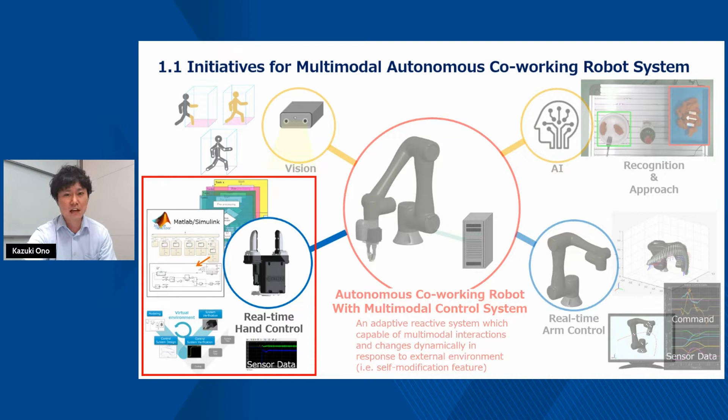To begin, I'm going to start with the explanation of multimodal control system for coworking robot system that we are working from. We define the autonomous multimodal control system as a system that can respond to environmental changes reactively and autonomously, based on multimodal information obtained from vision and AI, as well as sensing information from sensors mounted on robot hands and arms. In today's presentation, I will focus on the development of a robot hand equipped with multiple sensors.

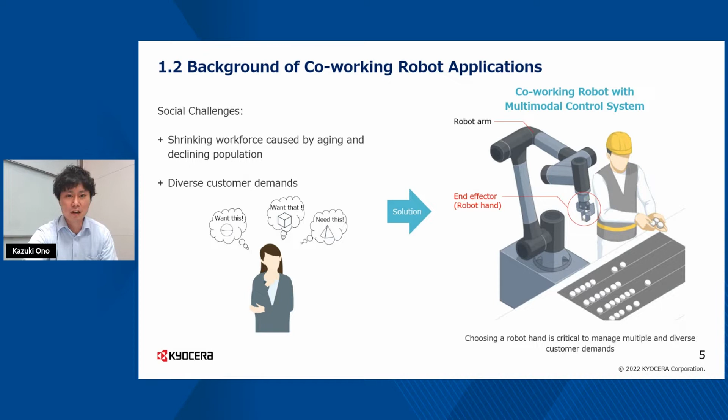Next, let me explain the background of coworking robot applications. Probably most of you have already heard that the shrinking global workforce and declining population could impact economic growth. Also, since consumers crave personalization addressing their unique characteristics, preferences, and backgrounds, the aging populations are a major challenge to serve diverse customers. That is why coworking robots with multimodal control system have attracted attention in recent years as a solution to these challenges. In this presentation, we will focus on one part of the multimodal system, which is the development of a robot hand equipped with multiple sensors.

You know that the human hand is known for its ability to manipulate objects and perform tasks with great degree of precision, such as gripping and grasping. On the other hand, it is very difficult for a robot hand to manipulate objects as precisely as a human hand, because a robot hand is usually designed specifically to perform specific tasks, since there is no practical general-purpose robot hand that can replace the human hand to perform any task.

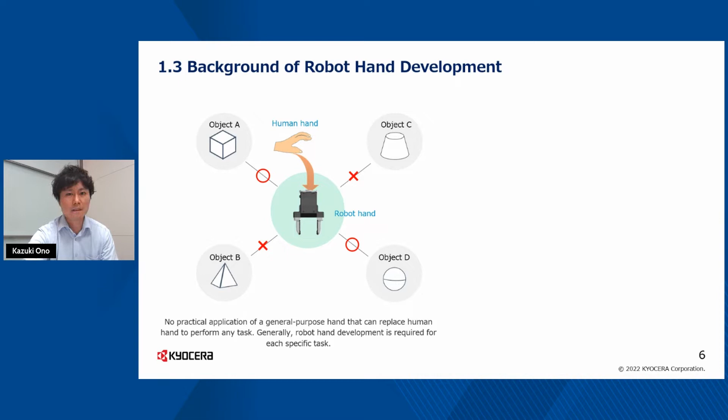Generally speaking, robot hand development is required for each specific task and object. This is a problem because this development requires a great amount of time and resources. That is why I think we need to think of a method to develop a robot hand that can respond quickly to various customer requests.

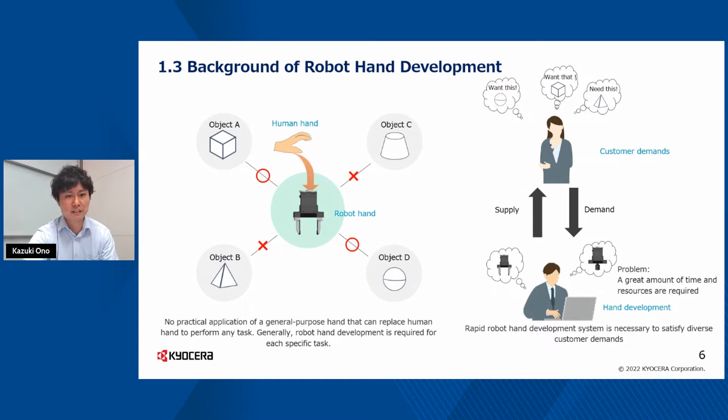That is where we introduce our proposal, which is a software development kit for robot hand control system development. We believe that by using our proposed SDK, we will be able to develop this robot hand system efficiently. In Chapter 2, I will explain the features of this SDK in detail.

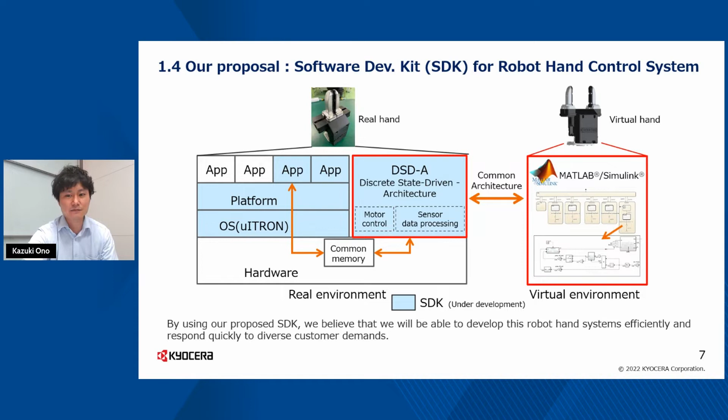Another approach that I'm going to cover in this presentation is model-based design. By using MBD shown on the right, front-loading the design process can be done, which then improves the design quality. Also, robustness can be estimated by considering variations and noise in a virtual environment. We believe that MBD is another approach that can be used to develop robot hands quickly.

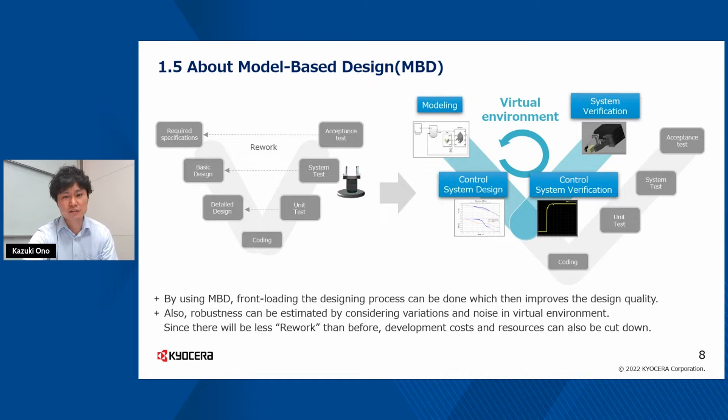Next, let me explain our SDK proposal for robot hand control system in detail. Let me talk about three features of the SDK for robot hand development. First, the SDK is divided into a discrete state-driven architecture part, which performs sensor processing and controls actuators, and an OS part, which manages other applications. Second, the DSD-A and OS parts exchange information via common memory.

Third, the DSD-A part handles the design of control software related to the hardware configuration, such as the type of sensors or motor control. This feature is particularly important because the key to increasing the development speed depends on how quickly the DSD-A part can be built. From the next page, I will explain the features of DSD-A in more detail.

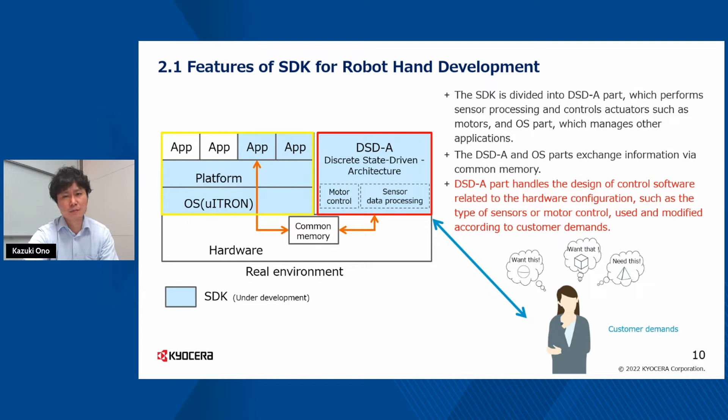One of the most significant features of DSD-A is that it can be described by Simulink and has a common architecture in real and virtual environments. This means that you can design DSD-A in a virtual environment and then replace it with the software for the real environment. Next, I will explain the process used to develop the DSD-A system.

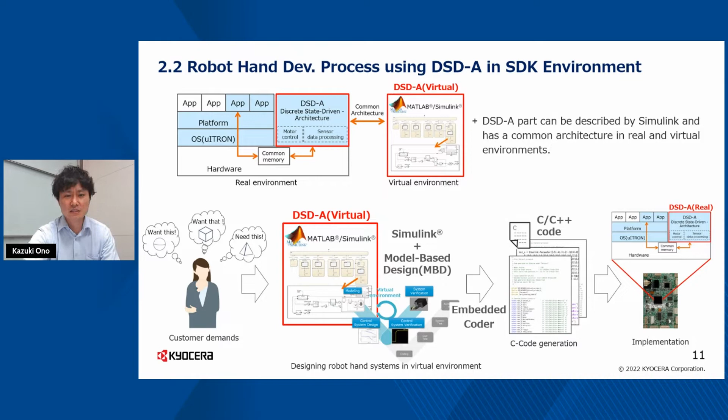The first step is to design a DSD-A hand system in a virtual environment using Simulink and MBD. Next, use the Embedded Coder of the MATLAB tool to convert it to C language. Then, directly implement the real DSD-A system content onto a microcomputer. Using this process, the system can be developed without programming. Now, let me explain more about the detailed structure of DSD-A.

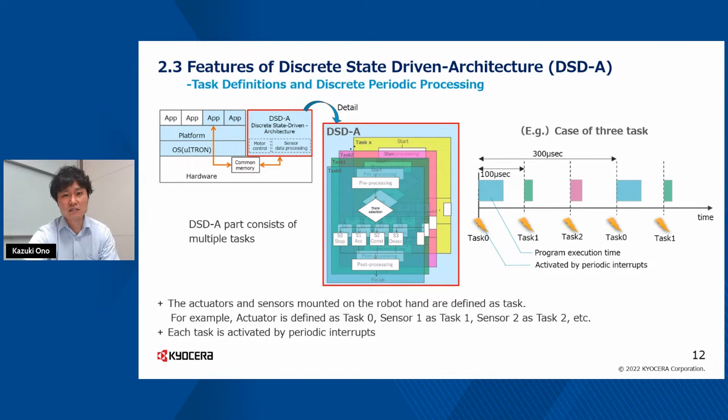DSD-A consists of several tasks. The actuators and sensor mounted on the robot hand are defined as tasks. Each task is activated by periodic interrupt.

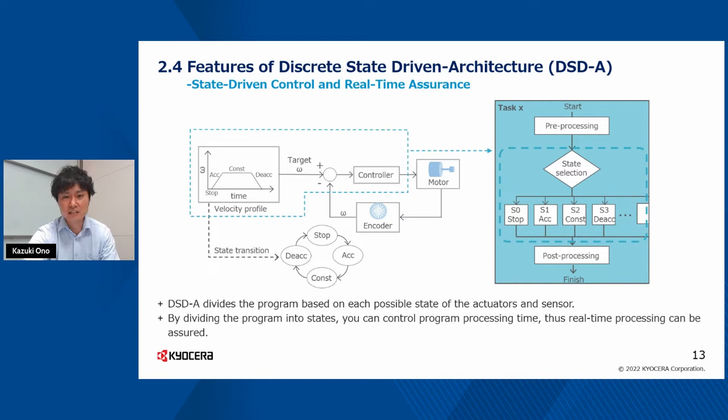Another feature of DSD-A is that it has a discrete state-driven structure. This page's content is also explained in Chapter 3, so I'm going to briefly introduce it here. DSD-A divides the program based on each possible state of the actuators and sensor. The important thing is by dividing the program into states, you can control program processing time. Therefore, real-time processing can be assured.

Let me summarize the content of the SDK and DSD-A. By using our proposed SDK, we believe that we will be able to develop this robot hand system efficiently. I explained that inside the SDK, the DSD-A part basically handles the software design based on customer requirements. This DSD-A has three features.

The first is it has common architecture in both real and virtual environment. Thus, it is possible to seamlessly implement the content designed in the virtual environment onto microcomputer. Second is that each task of DSD-A is activated by periodic interrupts. And finally, with DSD-A, real-time processing can be assured.

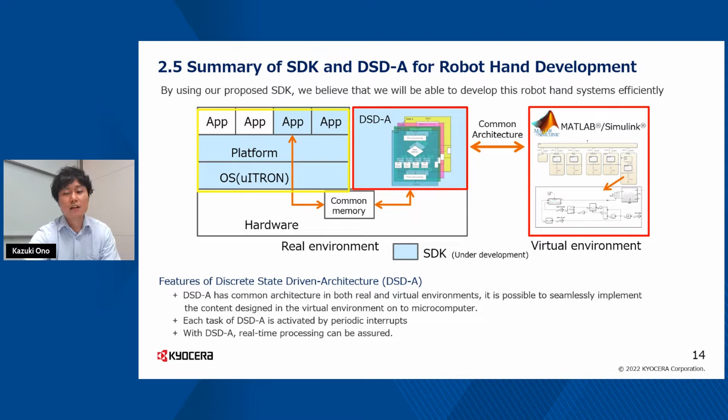In the next chapter, I will provide an overview of robot hand development using the SDK and MBD and MATLAB tool. This is a practical example of our robot hand development. I will introduce a parallel-chuck type hand system that can control stroke width by acquiring velocity and contact force information in real time. This is a block configuration of robot hand real system.

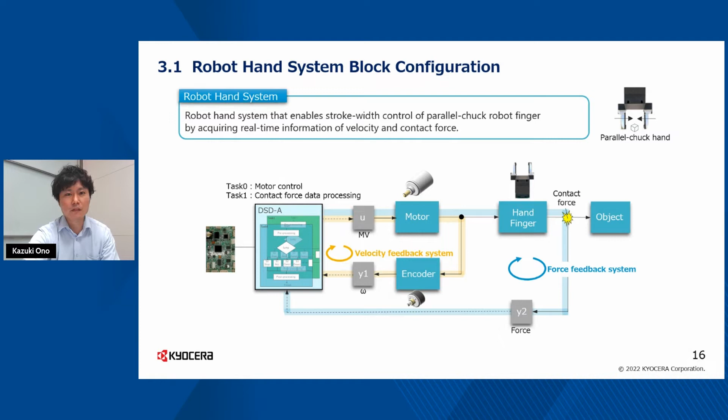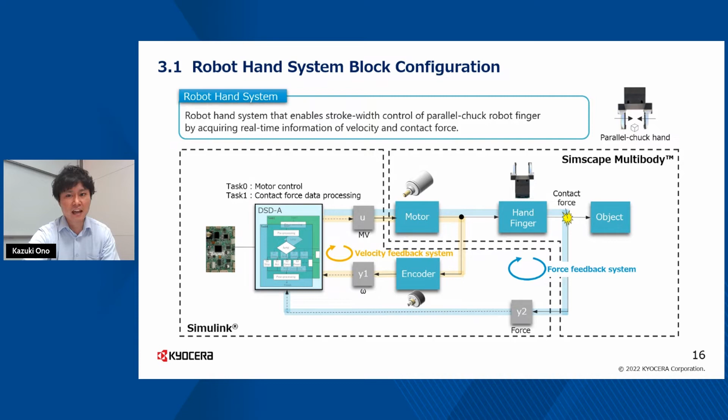Next, let me explain the process of robot hand development using MATLAB that we carried out step by step. Inside this system block configuration, DSD-A part is modeled by Simulink, and the parts of the mechanical mechanism, object, and contact force are modeled by Simscape Multibody.

The first step of robot hand development is plant modeling. This is a system block configuration modeled by Simulink and Simscape Multibody. For example, DSD-A is written using Stateflow to perform task scheduling and control system design. Also, contact force modeling can be represented using Simscape Multibody contact force blocks.

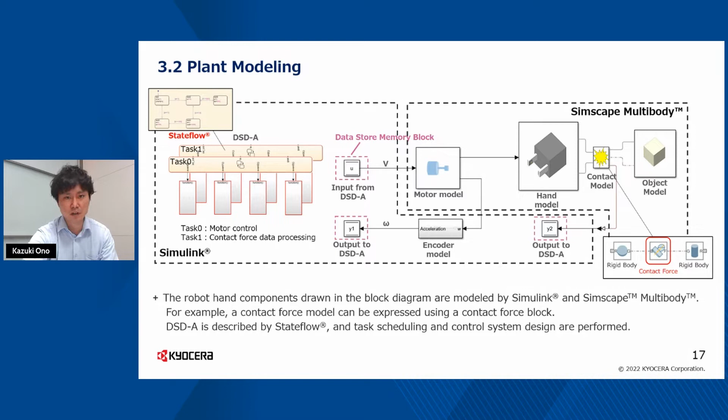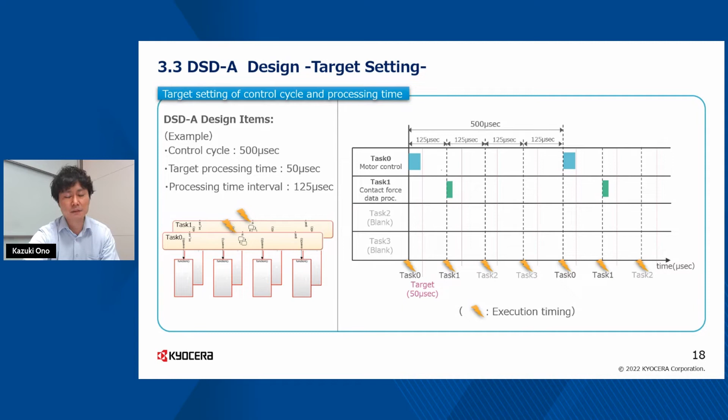After setting the control cycle and processing time, we then assign the state to both task 0 and task 1. As described in Chapter 2, we assign these states to DSD-A based on state transitions. For example, for task 0, which is the task for motor control, we have four states of velocity profile which are stop, acceleration, constant, and deceleration.

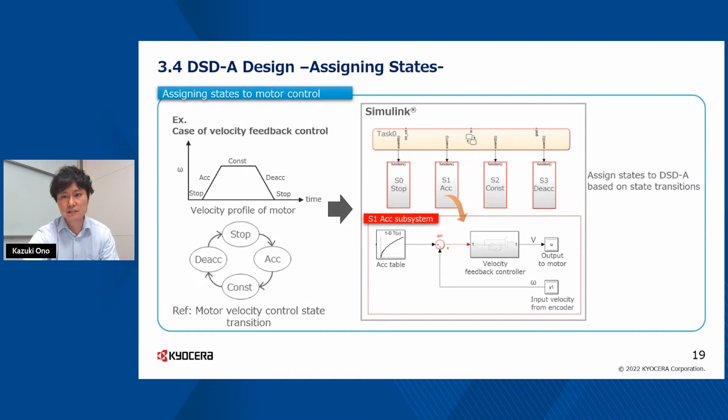We use Simulink function call subsystem to create and set table for target velocity and velocity feedback controller for each state. After assigning state to task 0, we also need to assign task status to task 1 similarly.

Next step is to design the control system with DSD-A. The control system can be designed to include sampling frequency and dead time. In this model, the sampling frequency is expressed by setting the Stateflow to start periodically, and the dead time is expressed by using the transport delay blocks.

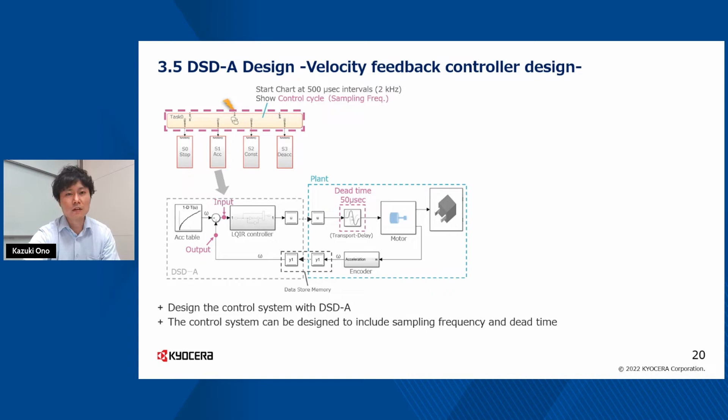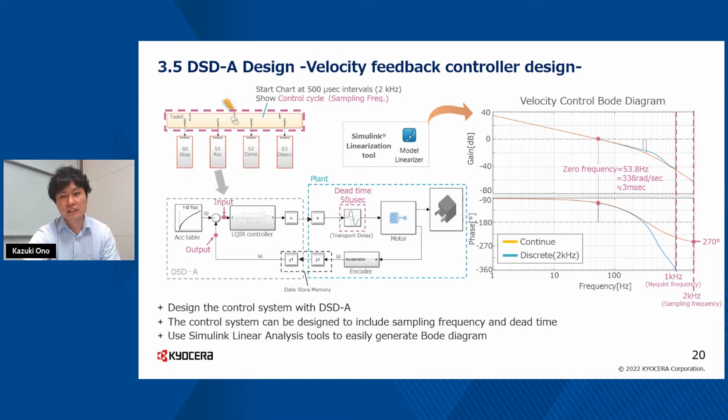Bode diagram can be easily drawn using the Simulink linearization tool. In the Bode diagram of a discrete system, you can see that the sampling frequency and dead time are included. On the next slide, we will verify this control system.

Here, we can confirm that the motor velocity signal realized with a time constant of 3 milliseconds against the step signal indicated in yellow line. This corresponds to the zero frequency in the Bode diagram, and the validity of the control system was confirmed.

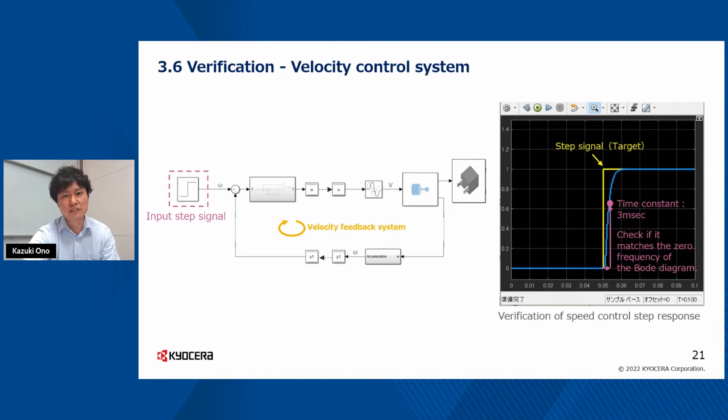Simscape Multibody enables visualization of robot hand system dynamics. This scope monitors the result of motor velocity according to the movement of the robot fingers. Blocks from the dashboard library allow you to manipulate the model freely during the simulation. This video shows how inputting the target position during the simulation and pressing the moving button starts the finger velocity control.

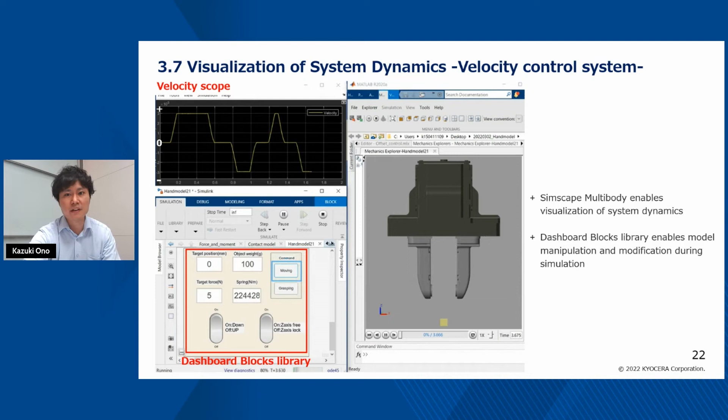So far, I have demonstrated how to design velocity feedback control. Next, I will talk about force feedback control. The result of the simulation is shown on the video on the right. Here, the target force is set to 5 Newtons. As soon as the robot finger contacts the object, the contact force exceeds the target force value, and then about 60 milliseconds later, the stroke width is adjusted, and the contact force converges to the target force.

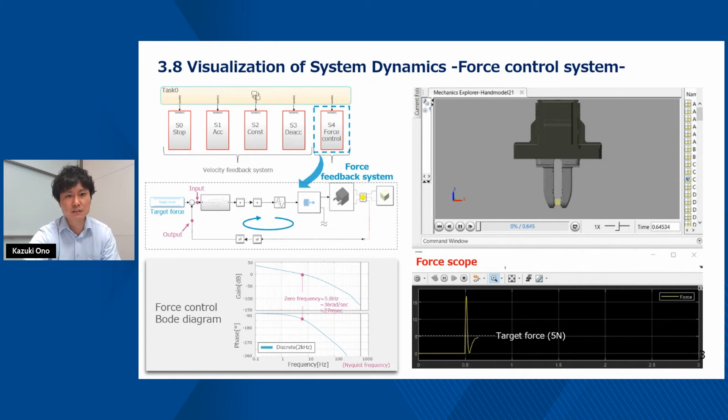By doing this, we can check system performance and detect system problems early. In the next step, the DSD part designed in the virtual environment is converted to C language using Embedded Coder. The converted code can be directly implemented into the microcomputer of the real DSD system. One advantage of using Embedded Coder is that it can greatly reduce programming time.

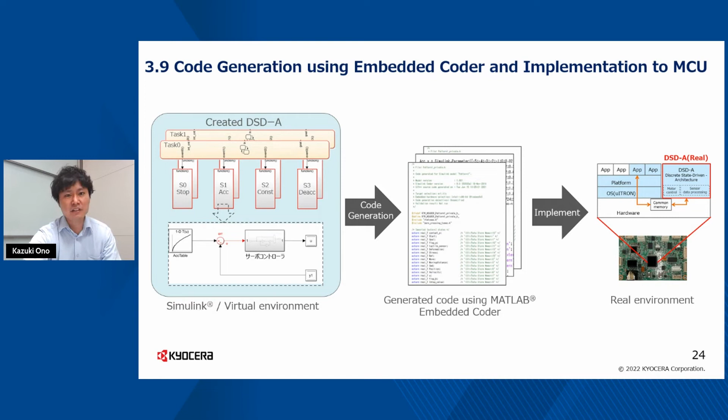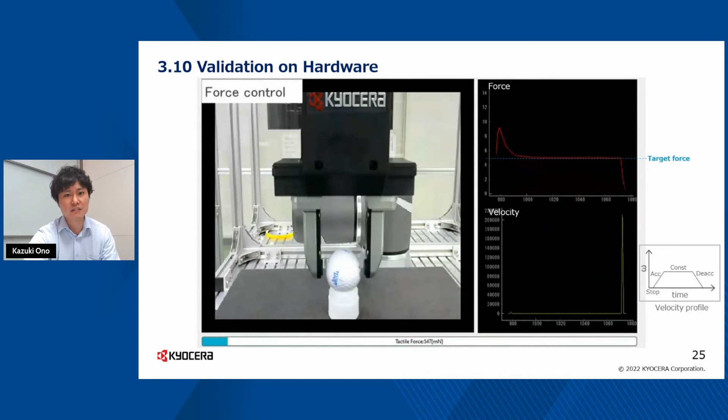For validation, the microcomputer is mounted on the robot hand. First, the robot finger is controlled using velocity control, and you can see here on the velocity graph that it matches the velocity profile set beforehand. As for force control, the contact force exceeds the target value at the moment of contact, but it converges to the target value immediately, similar to what happened during simulation.

In Chapter 4, I will give an overview of algorithm development such as motion plans that we are working on in addition to robot hands, and introduce our initiatives towards multimodal robot systems. We also use MATLAB to model the robot arm. If the robot is ROS compatible, its model information will be open source, and we can easily import the robot model using Robotics System Toolbox.

We are also developing motion plan algorithms. In order to visualize the results of our algorithms, we combine them with the arm model to simulate system dynamics. Moreover, we are working to use the model developed in MATLAB to operate the actual machines. In this way, we have created a process in which the robot arm can be verified in both real and virtual environments.

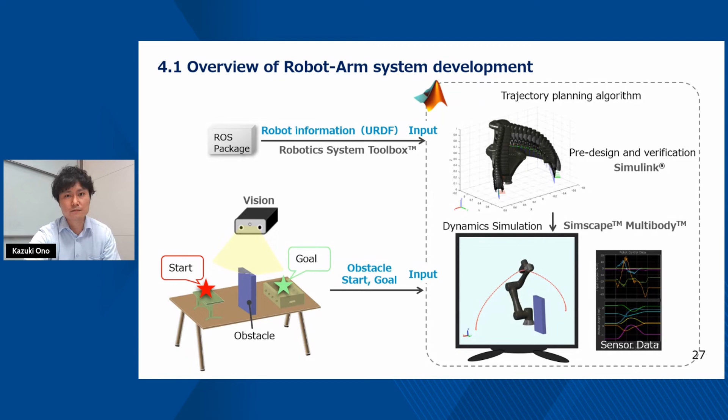We combine all model components of vision, robot hand, and arm. Since our hand system was built using DSD, it is possible to assure real-time performance and synchronize data communication with the robot arm component. Also, the arm can operate based on various data results obtained by other components, making it possible to perform multimodal control.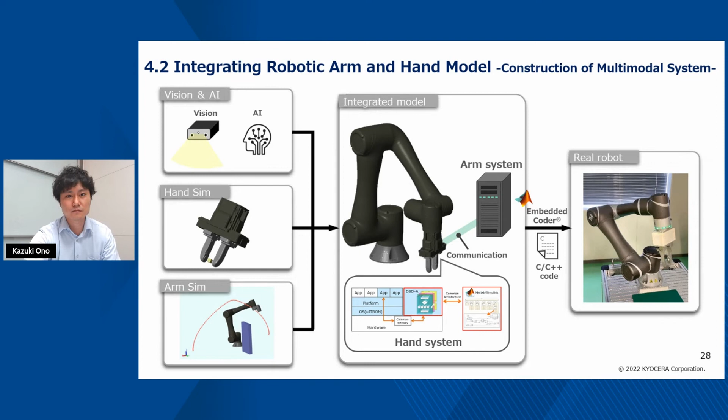Here, the calculation result from the dynamic simulation of the integrated model in MATLAB is input into Unity for visualization. In this way, by reproducing the user's environment such as lighting, shadows, objects, and obstacles in a virtual environment, we can solve various problems that may occur in the real environment in advance. So design quality can be improved, and development time and cost greatly reduced.

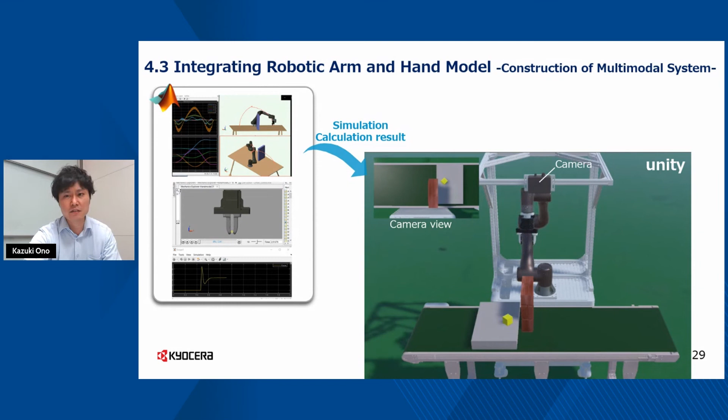So let me summarize today's content. I'm mainly in charge of the development of the robot hand system, and I created the model using MATLAB tools and built the system on DSD. I started using MATLAB tools about 2 years ago, and in my opinion, the UI design was very easy to understand. Therefore, I think it is possible to build a system even with little programming knowledge.

Also, there are a lot of applications that can help with the design of the control system, which reduce development time and resources. I also like the fact that there are a lot of visualization tools such as Simscape Multibody. Visualization tools have made a great contribution to detecting system problems as well as visualizing data communication. Embedded Coder was very useful. I think we have saved a lot of development time because we don't have to write scripts manually.

However, there are a few requests I would like to make. Simulation performance was degraded for complex simulations, such as contact force, multiple sensors, and robot complexity. Especially for contact models, simulation accuracy is very important and data reduction is rarely possible. So I hope MATLAB will provide tools to understand the trade-off between performance and precision.

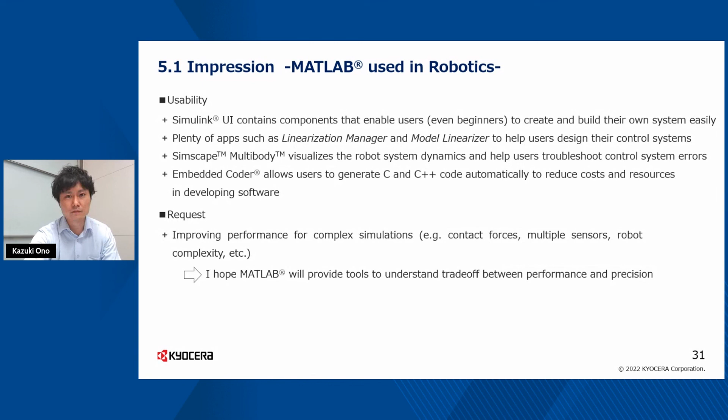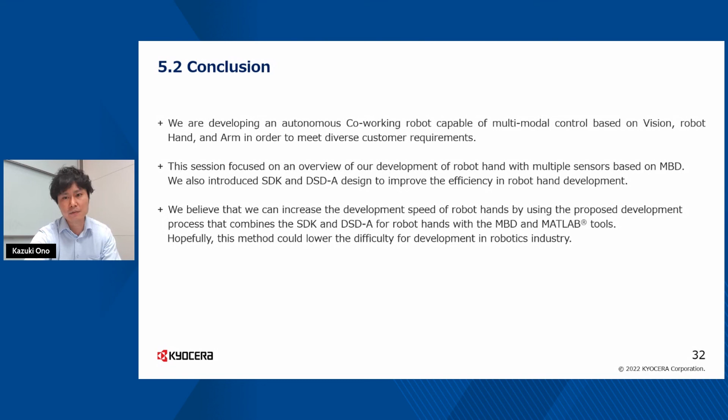Finally, for the conclusion, there are 3 things that I have introduced today. We are developing an autonomous coworking robot capable of multimodal control based on vision, robot hand, and arm in order to meet diverse customer requirements. We also introduced SDK and DSD design to improve efficiency in robot hand development. We believe that we can increase the development speed of robot hands by using the combined system of SDK and DSD with MBD and MATLAB tools. Hopefully, this method could lower the difficulty of development in the robotics industry.